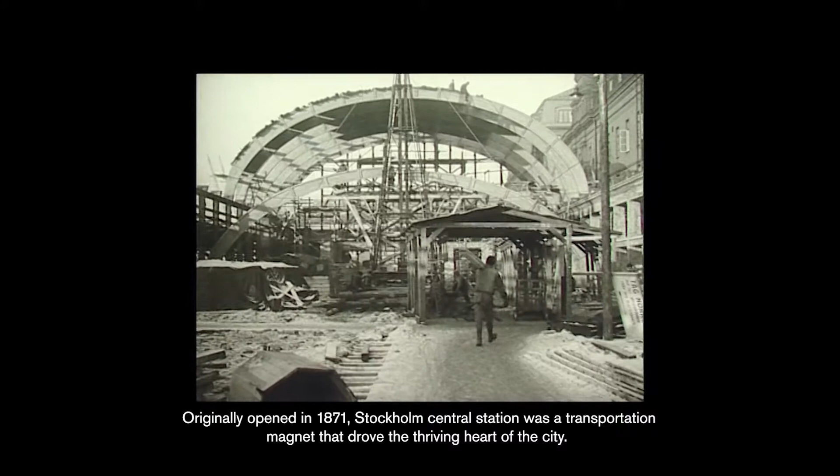Originally opened in 1871, Stockholm Central Station was a transportation magnet that drove the thriving heart of the city. But it had a detrimental effect on the urban fabric, which was compounded by the impact of the car in the 1960s. This commission to oversee the expansion of the rail network and provide a new master plan for the area gives us a great opportunity to reinstate the central station's position in the city and develop Sweden's most central hub for sustainable travel.

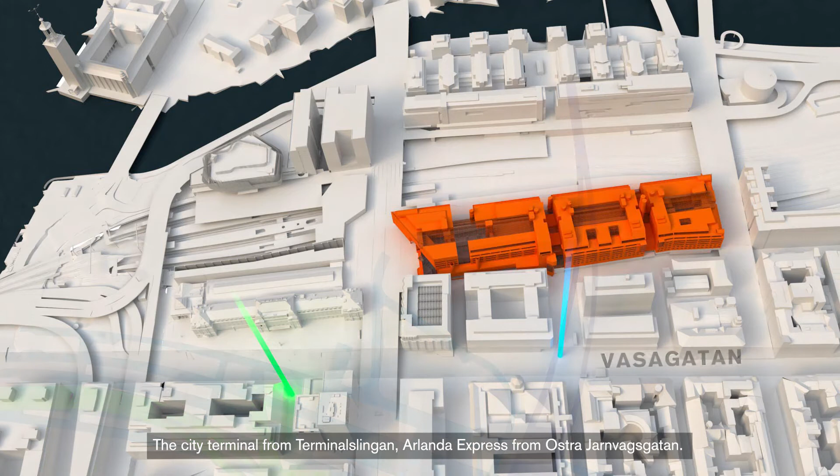The current central station configuration for the user feels like 4 separate transportation systems, with the central station, the Citybanan, the green and blue metro lines all connected from different sides of Vasagatan. The city terminal from Terminalslingan, Arlanda Express from Östra Järnvägsgatan.

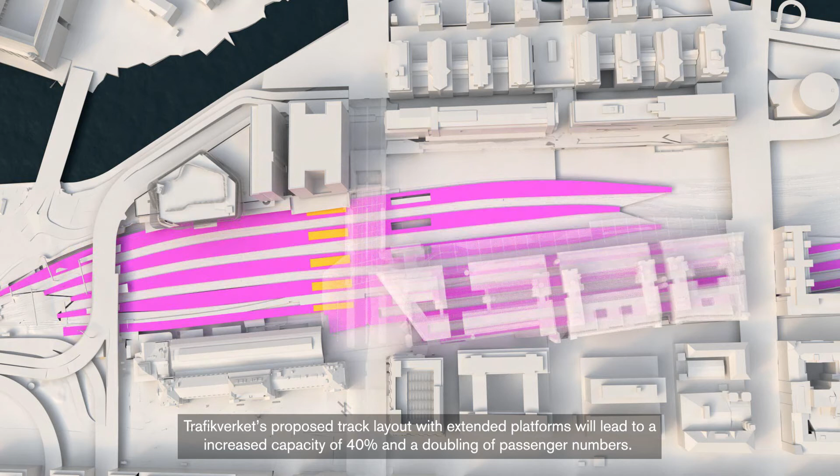Trafikverket's proposed track layout with extended platforms will lead to an increased capacity of 40% and a doubling of passenger numbers. We therefore have the opportunity to bring together all modes of transport in a single transportation hub by making the following big moves.

Realign the new central tunnel with Klarabergsgatan to create a below-ground east-west link across the site. A possible future addition of a new tunnel could provide a below-ground connection directly through to the Citybanan.

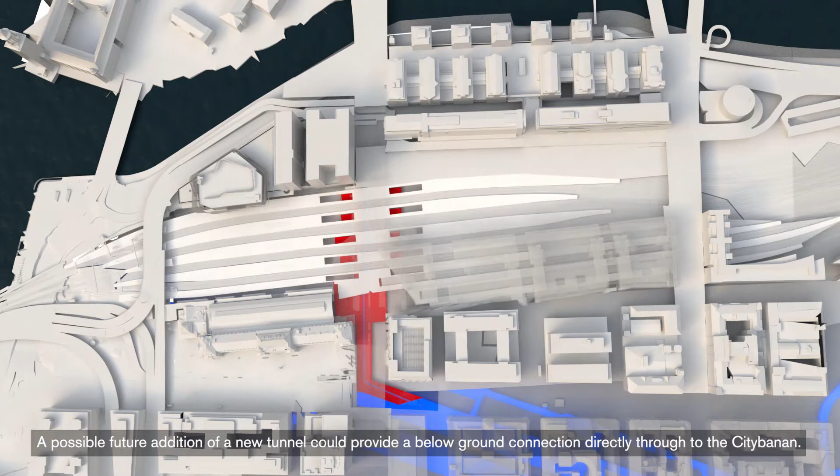The tunnel will then connect to the midpoint between the extended platforms of the central station, Arlanda Express, the bus terminal and the city terminal, which allows us to bring together 4 modes of transport to create a single intermodal station. For future flexibility of the track layout, we have chosen advanced construction techniques to bridge across the track.

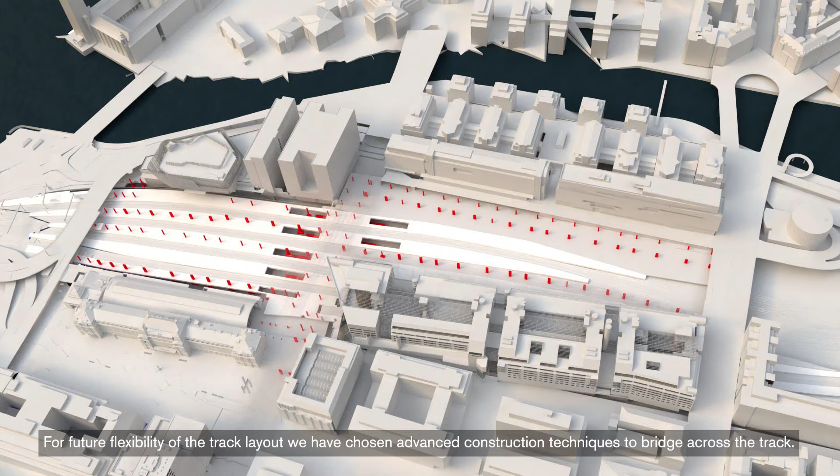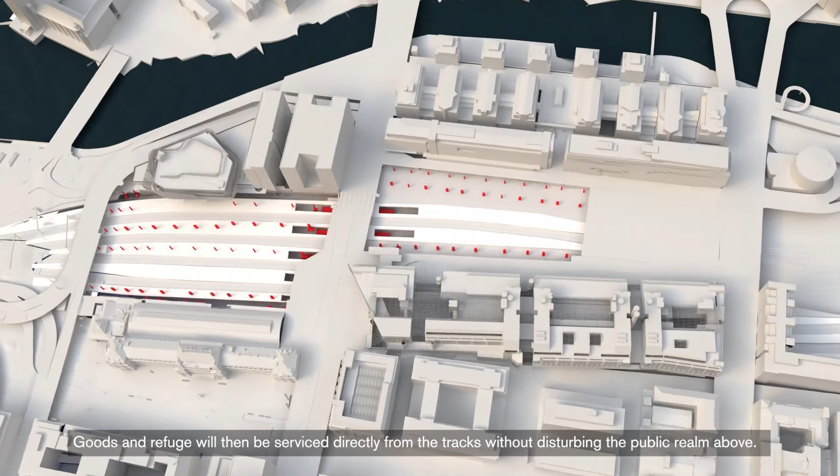There is space on the western side of the tracks where a new centralised logistics centre could be positioned. Goods and refuse will then be serviced directly from the tracks without disturbing the public realm above.

By redirecting private vehicles and only keeping the bus route, we can remove half of the Klarabergsgatan viaduct. This creates the space which allows us to extend the northern end of the historic waiting hall.

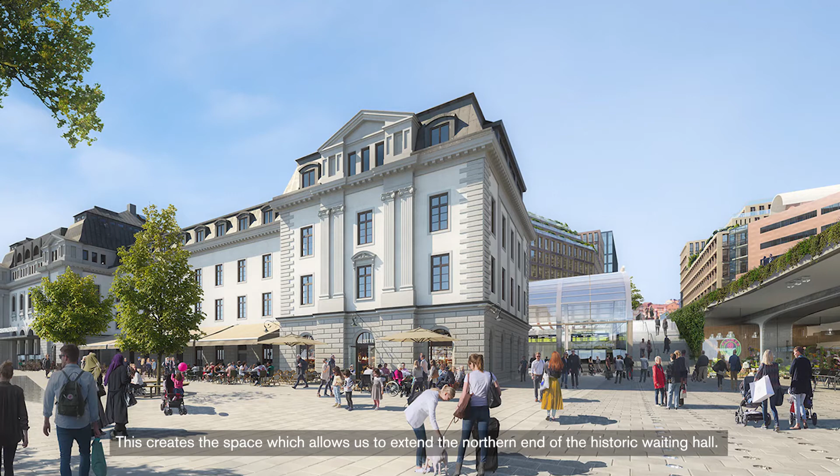A new entrance hall will combine the new and historic parts of the station, linking the central station platforms, the city terminal buses and the Arlanda Express trains, creating a single intermodal transport hub.

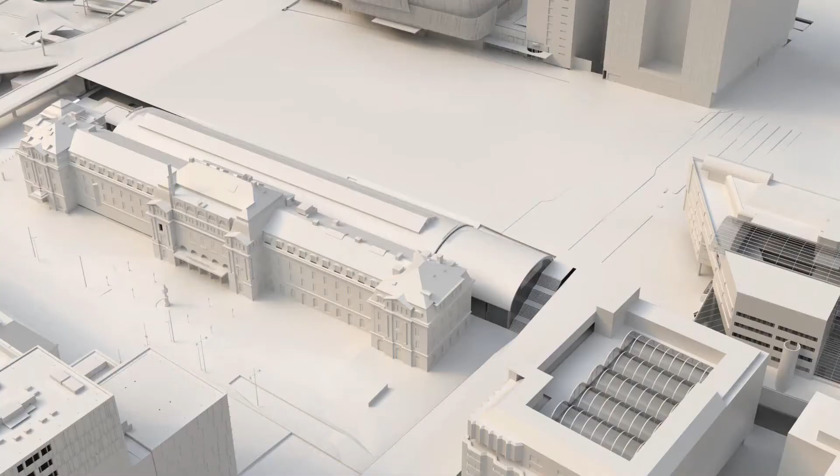The new deck level reaches Vasagatan and the new connections towards Central Plan and also towards Kungsholmen. This enabled a southern entrance to the railway.

Remove the C building to create space for the waiting hall to breathe and open up views of Gamla stan and Riddarholmen.

Creating a new public square to mirror the chamfered southern facade of the World Trade Center building, thereby reducing the width of Klarabergsgatan, forming a new southeast facing pocket plaza.

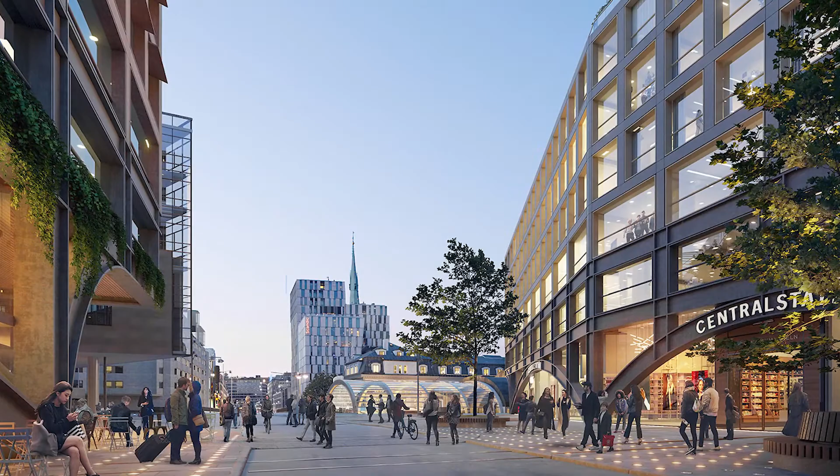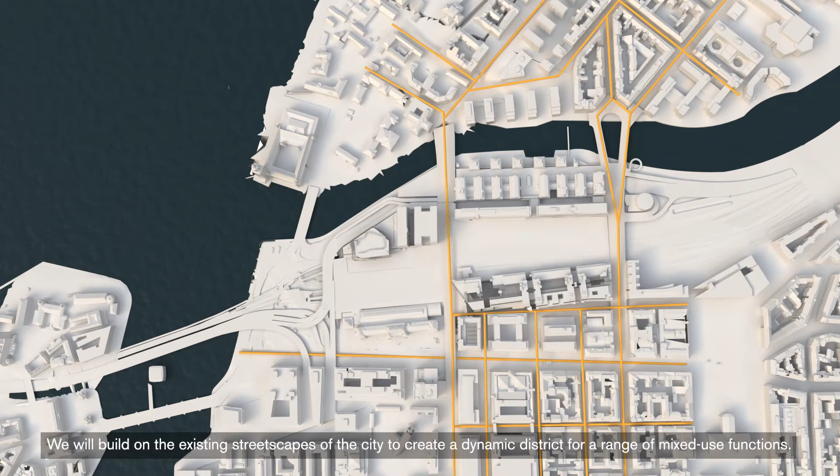To become a natural part of the historic street pattern and recreate the scale of the Klara blocks, we will build on the existing streetscapes of the city to create a dynamic district for a range of mixed-use functions, activated public realm and better connectivity with clear wayfinding.

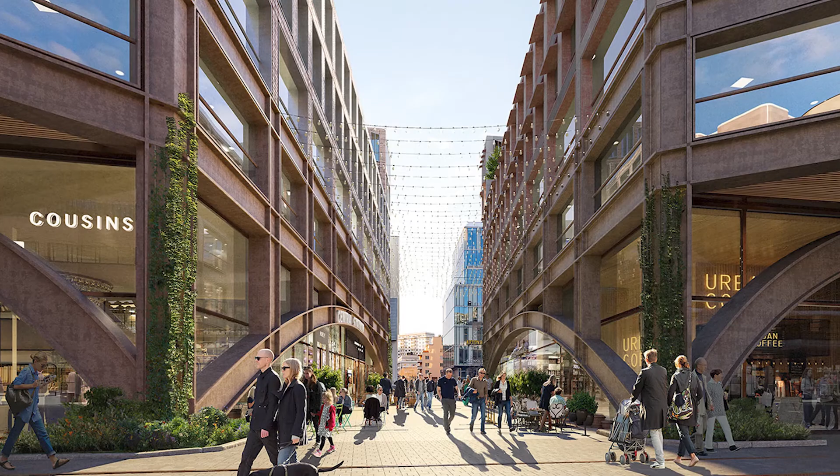Recreate the historic station railway park on the southern tip with spectacular views over the old town of Gamla stan, Södermalm and the City Hall. It will be a new green meeting place for the city centre.

With respect to the historic skyline of Stockholm, we have minimised the impact of the massing by adapting the urban blocks to be integrated into the surrounding scale.

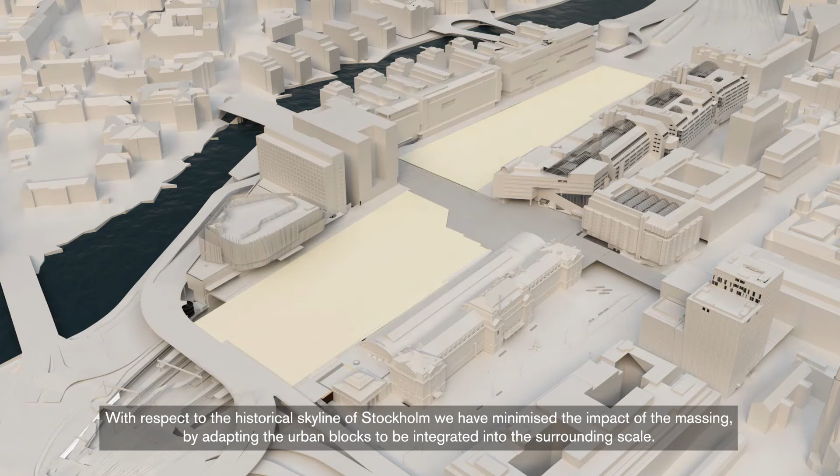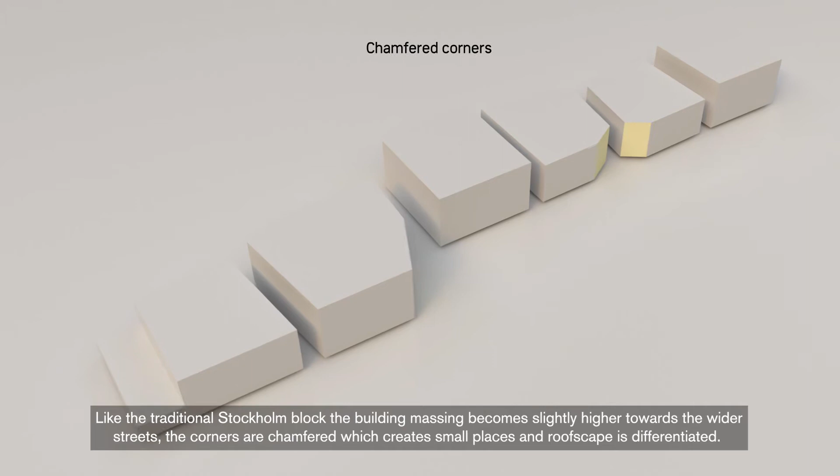Like the traditional Stockholm block, the building massing becomes slightly higher towards the wider streets. The corners are chamfered, which creates small places, and the roofscape is differentiated.

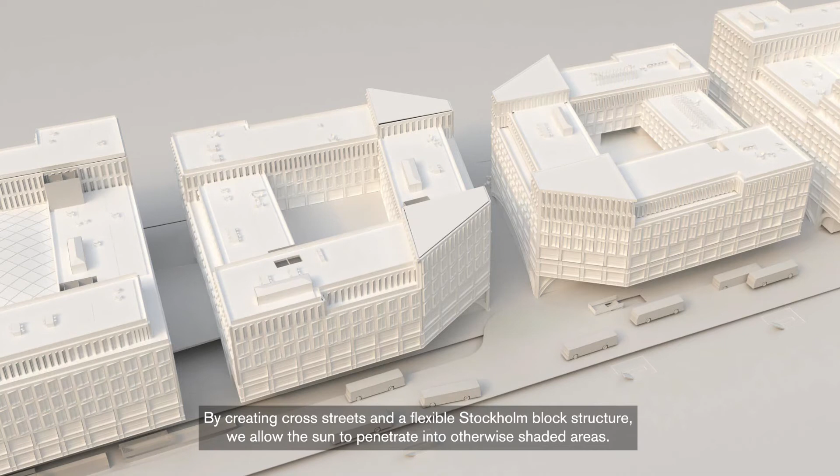By creating cross streets and a flexible Stockholm block structure, we allow the sun to penetrate into otherwise shaded areas. The blocks are a contemporary interpretation, but also moulded to respond to their environment.

Here, with the arch, recognised in many of Stockholm's bridges and seen in many railway buildings, we see an example of architecture and structure that gives a strong identity to the base, the station functions and the railway.

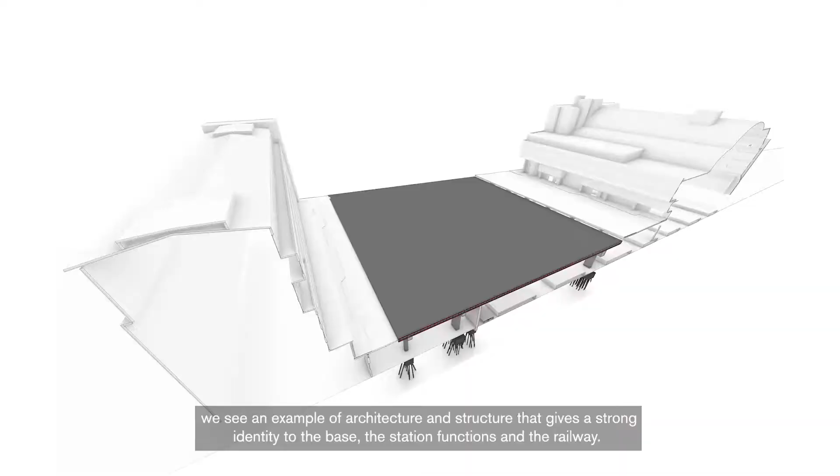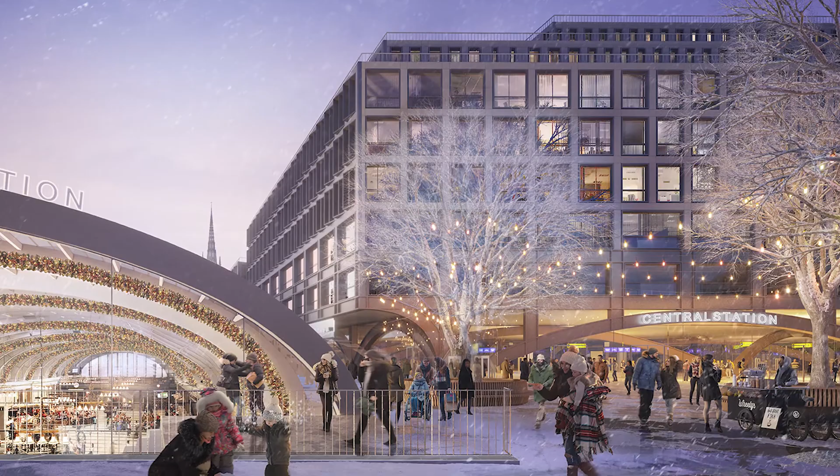The station and integrated buildings forming the new transportation hub function on 4 different levels: the underground tunnels to provide increased connectivity, the platform level with extended access for increased capacity, the upper deck level with new vibrant public realm, and the new mixed-use development above.

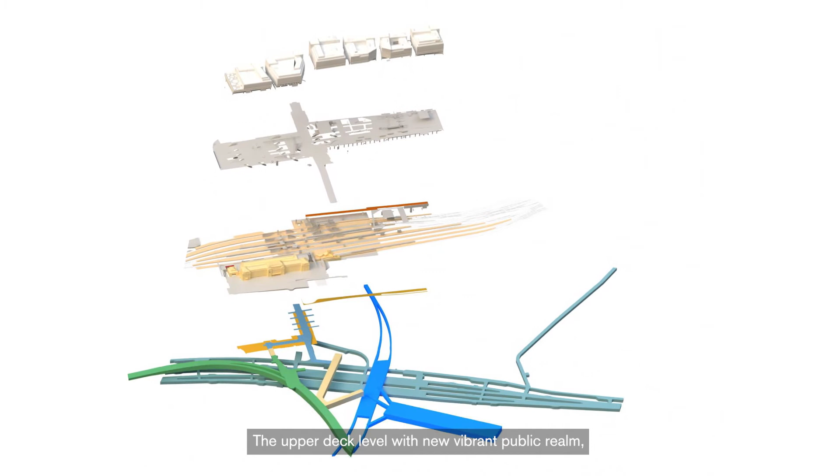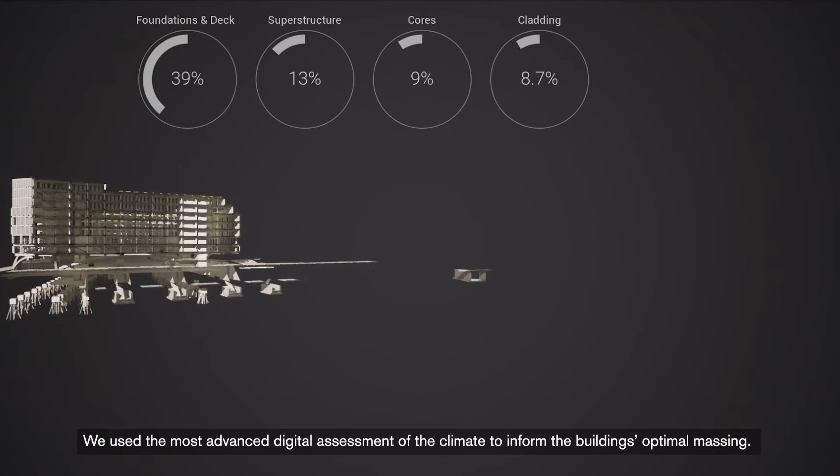Our aspiration was to create the world's first climate restorative transport interchange. We have used the most advanced digital assessment of the climate to inform the building's optimal massing.

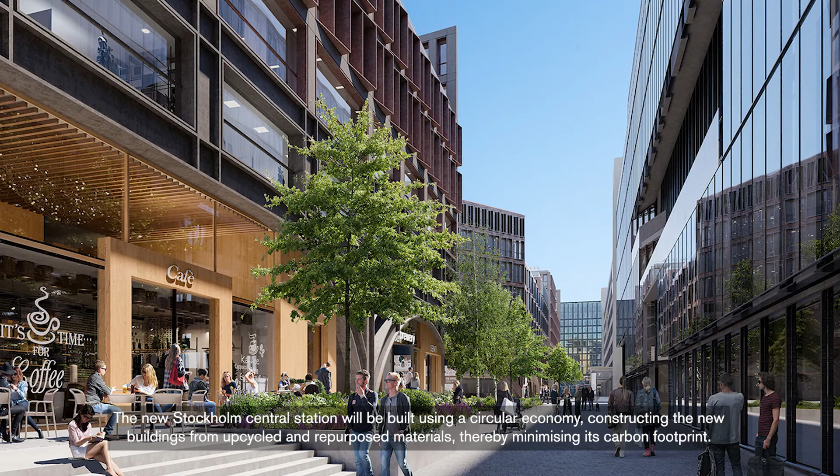The new Stockholm Central Station will be built using a circular economy, constructing the new buildings from upcycled and repurposed materials, thereby minimising its carbon footprint. We hope that together we can realise our dream to create the world's first climate restorative transport interchange.

Based on the unique history, we will create the new Central Station, sustainable travel for all of Sweden and more Stockholm to love.

Welcome to Central Station.